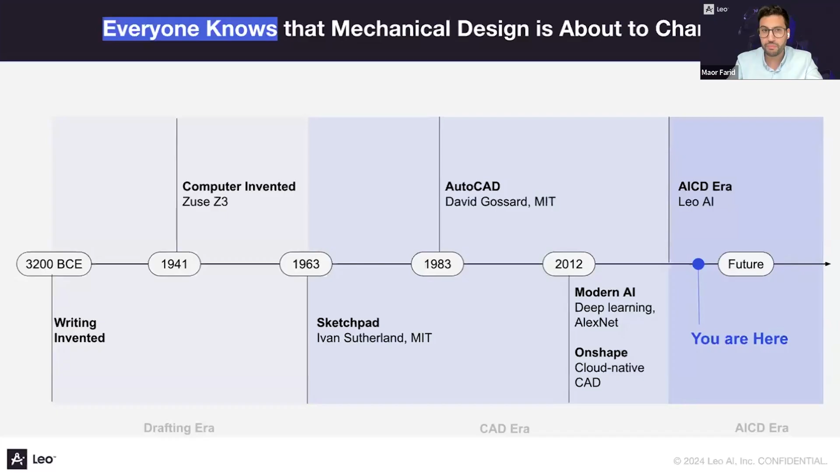And we're basically here. This is our time, mechanical engineers, to decide if we're letting this train pass by, or go all in and hop on the train. So what really is the problem with mechanical engineering today?

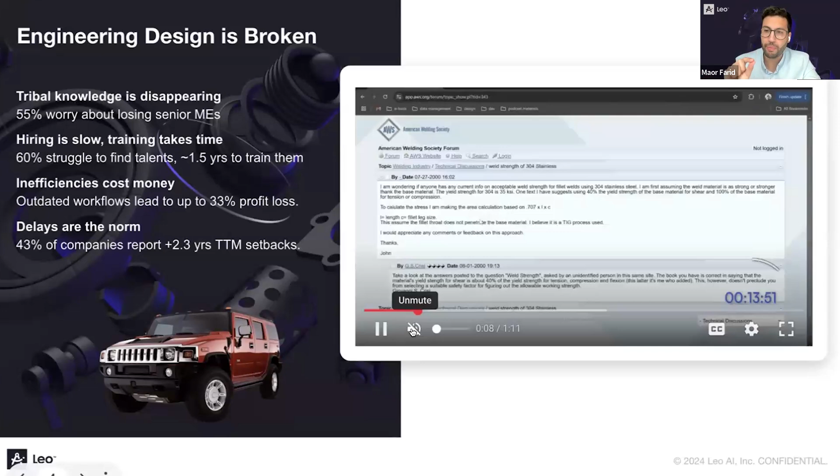What is so broken? This is a real screen recording of a mechanical engineer, not designing a new Hummer vehicle, but just trying to add the simplest part of engineering, which is a bolt, just one bolt. As you can see, maybe you sympathize with this, if you've done mechanical design.

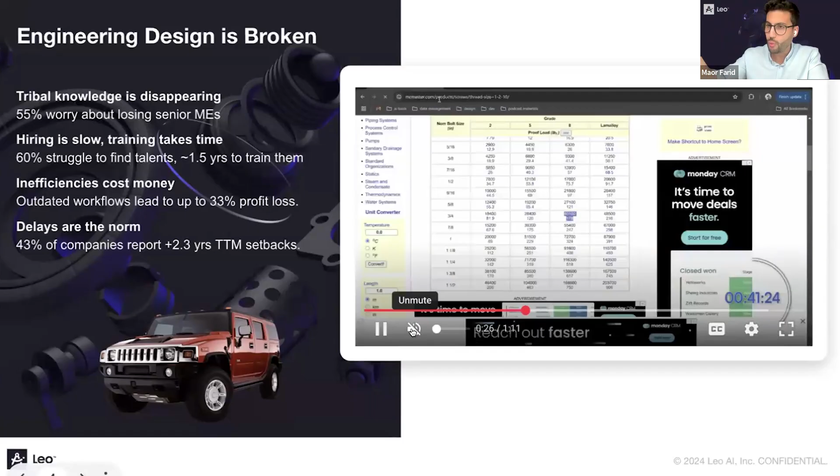He's going to the CAD only when he knows exactly what bolt to put, where, and what's the diameter, etc. But all the rest of mechanical engineering is not CAD. Engineering is not CAD, and CAD is not engineering.

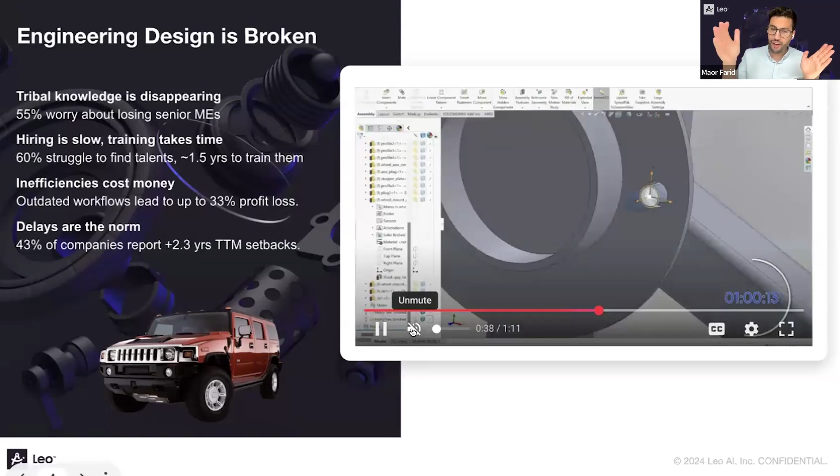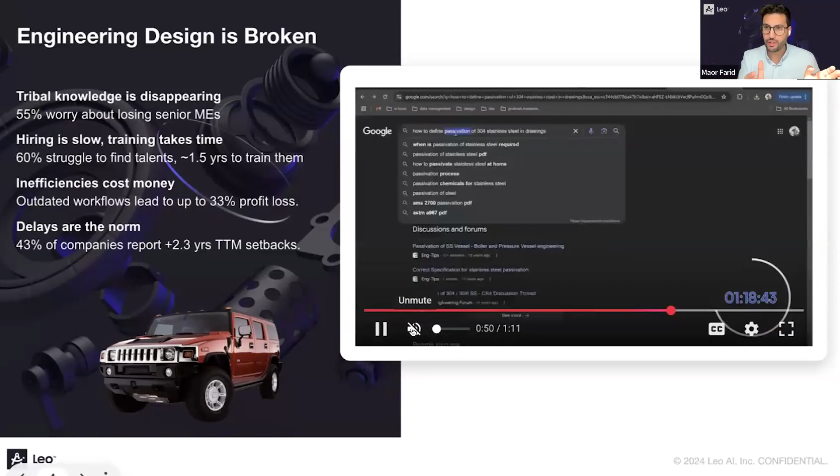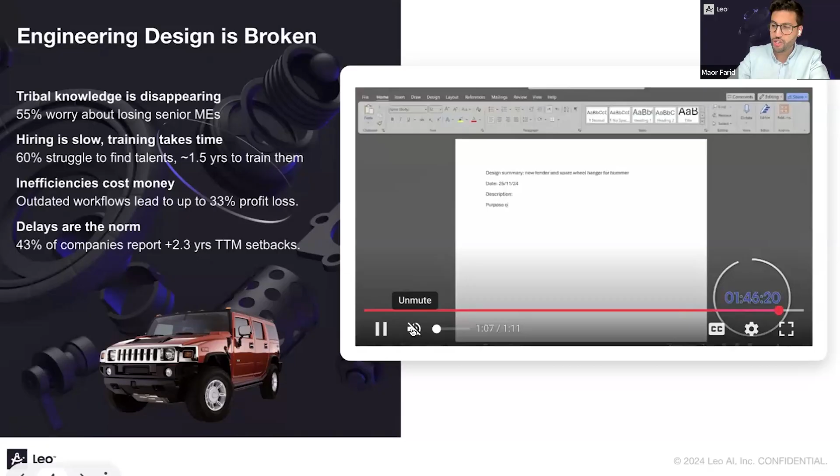85% of the time is us engineers trying to figure out what exactly to do, what exact bolt to choose. So he's going to Google, trying to find the formula for the Von Mises stress, putting it on his Excel spreadsheet, asking Joe at the end of the corridor what's the safety factor that he needs to choose, or he's going to his PLM trying to find the right document that documents the safety factor and plugs it into the Excel spreadsheet. He's going to his PLM trying to find the bolt when he finally has the diameter that he needs, going to TraceParts if it's not on his PLM, etc.

So in this example, it took 1 hour and 52 minutes. This is how tedious our work is. This is how not creative our work as mechanical engineers is. And it shouldn't be that way.

We should focus on building, creating. We should make the decision on what bolt we need in order to go to the really interesting question: how do I make this design more carbon efficient? How do I make it more comfortable for my customers, etc. So the problem is knowledge.

In 2025, engineering knowledge is still siloed. Our knowledge as engineers is locked behind four different vaults. The vaults of the brains of the later career engineers - you know them, the engineers that have been in your organization since day one. Only they know what coating to choose, what thickness to choose in this and that housing. This is the tribal knowledge.

It's locked in the mountains of documents and CAD files that you designed during the decades of existence of your enterprise. Just imagine how many CAD files you have in your PLM, how many documents are written in your PLM. Some of them are text files, some are CAD files. In order to know, for example, what's the minimal thickness of the housing that I used in the 2023 model I designed, I cannot read it anywhere in text. I need to open Onshape and measure in the CAD assembly what's the minimal thickness. A lot of the information is embedded in the CAD, not written in text.

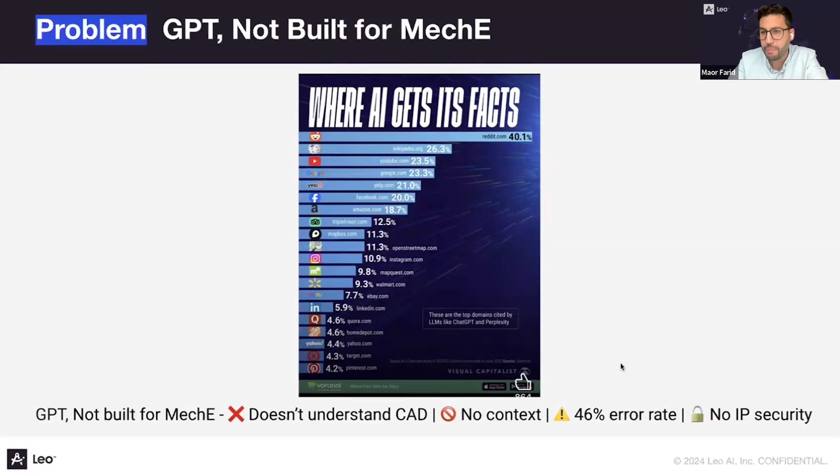So it's like talking to or getting insights from a blind mechanical engineer that cannot open your Onshape, your CAD tool, or whatever. If you're asking something about a shape or a design, it literally cannot help you. And of course, your IP is exposed when you're using ChatGPT.

So what we're doing at Leo, we're proud to say that we're developing the most boring AI for mechanical engineers possible, because we're focusing not on sexy, fairy dust kind of AI that looks good on TikTok, but we want to make you engineers happy. We want to make us, our friends, more efficient, feel like heroes, do fewer mistakes, and build better products faster. And how are we doing so?

We built the world's first AI that can understand CAD. It's not connected to Reddit. It's connected to 1 million bibles of engineering, only high fidelity, most reliable standards, workbooks, guidelines, and articles. It's connected into your PLM. It's like a super engineer that read all the wealth of knowledge of engineering and your tribal knowledge in your PLM, Windows directories, Confluence, and whatever.

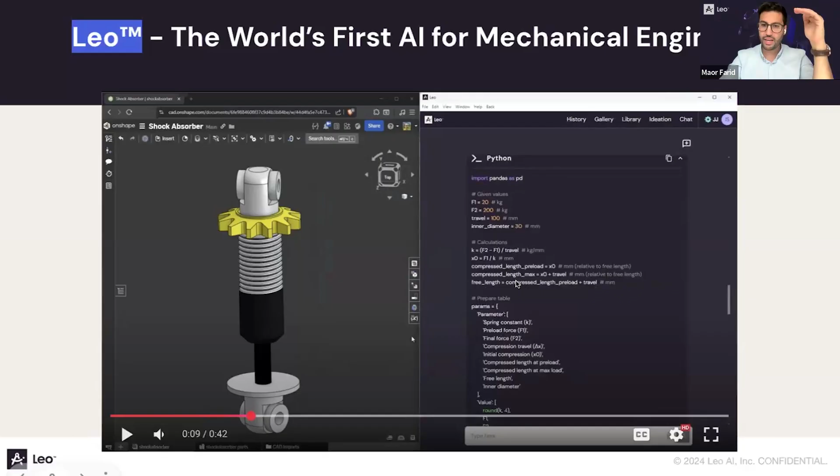You don't even need to open an Excel spreadsheet. Leo runs all the calculations for you. It provides the formulas from your guidelines or external guidelines, runs the calculation, and provides a table with all the calculations. You can download it if you'd like.

As an Excel spreadsheet. Then when you want to get the spring, you just tell Leo, hey, I want to buy the spring. First, Leo goes to your previous designs. If it finds it there, it provides you with the spring. If not, it goes to one of the 120 million vendor parts we have and provides you with the spring.

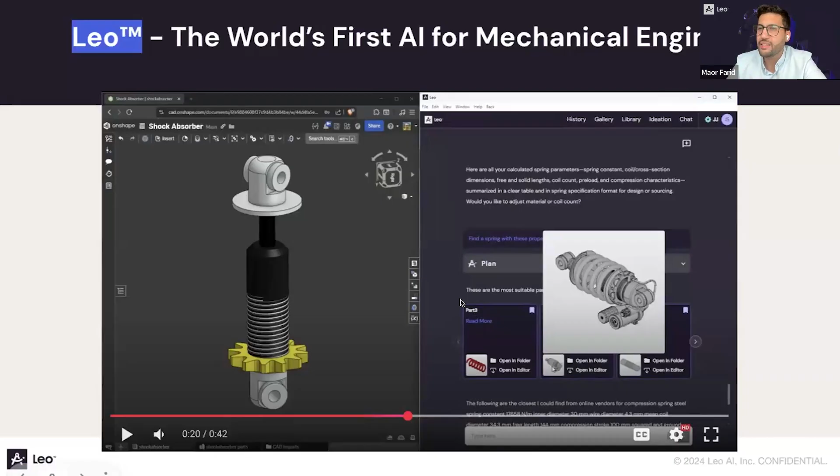Because Leo is not a language model like ChatGPT, it reads CAD. So even if the part is called 'part 3' and doesn't have the spring constant or length in its metadata, Leo understands CAD, sees what's in it, and can provide you with the spring that matches your needs and requirements. As you can see, they're a good fit, unsurprisingly, because it understands CAD and because it made the calculation for you.

Of course, it also asks guiding questions if it's missing information. So the answers are as reliable as they could be.

So what's the difference between ChatGPT and Leo? It's a more general question really: what's the difference between vertical AI—AI made by and for a specific profession, like AI for lawyers, AI for developers—and generic AI tools? Leo's differentiation with respect to ChatGPT and others is context, workflow integration, security, and last but not least, CAD understanding.

Context: it's integrated into your PDM. It knows your best practices and answers based on them, not just generic things you read on the internet. It's connected into your workflow. Leo works alongside your CAD, so you don't need to go to the browser and open it again. It's always there on your desktop as a desktop app.

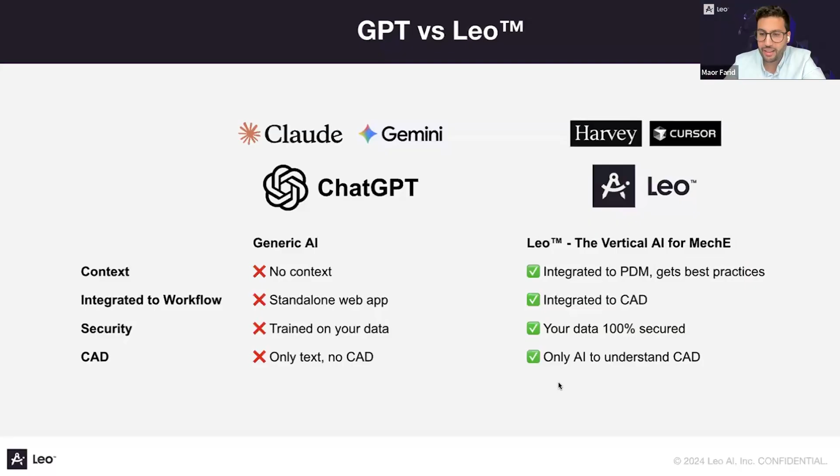It has top-tier, enterprise-grade, SOC 2 certified security—things we're bored about, but your IT guys are thrilled about. We have all the documentation needed. Again, this is the only one that understands CAD, so the only one that can serve mechanical engineers.

Maybe with that said, I've spoken enough. So this is a great opportunity to see how JJ is using Leo.

So JJ, what's up, man? Are you here with us? Hey, can everybody hear me? You hear me good? Yeah, I hear you loud and clear, man. I'm so happy to see you here again with us.

We're super thrilled about what you're building with Leo, and recently you started educating the next generation of engineers to use it. You started a new course training engineers to use Leo, right? That's correct. I was already teaching a course in CAD using Onshape, and we started integrating AI into the process to show them how to get the engineering done. The feedback has been incredible—people are really impressed, and they're learning mostly how it helps with the workflow.

People seem to have this illusion that AI is going to come in and do all the work for them, and you're going to say 'Build me a robot' and it'll just do it. But that's not really where it is. It's really helping with the workflow, all the very tedious tasks that take up most of our time.

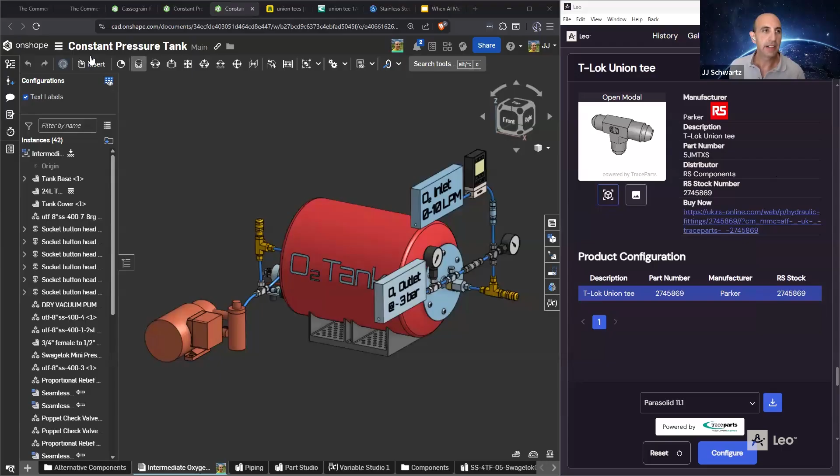I'll talk briefly about myself. Let me share my screen so I can show what we're doing. I have Leo open over here. Briefly about myself, I worked in space and aerospace, and most recently I'm a contributing author to the Commercial Lunar Economy Field Guide.

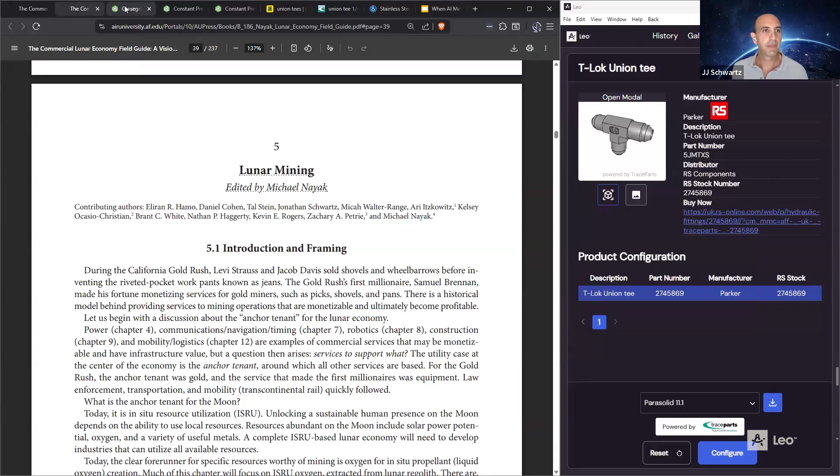I encourage you all to check it out, I'll share the link in the description. My background on my most recent project was on lunar mining, where I was a contributing author to this guidebook. That's something I'd encourage everyone to check out.

On that backdrop, I decided to work on some projects related to lunar mining of oxygen. One of the big challenges is heating the lunar regolith so you could produce oxygen. So one of the things I tried to do was design this lunar solar heat reflector that would concentrate the heat, as you can see from this simulation, and focus all the beams onto the surface of the moon to heat the lunar regolith.

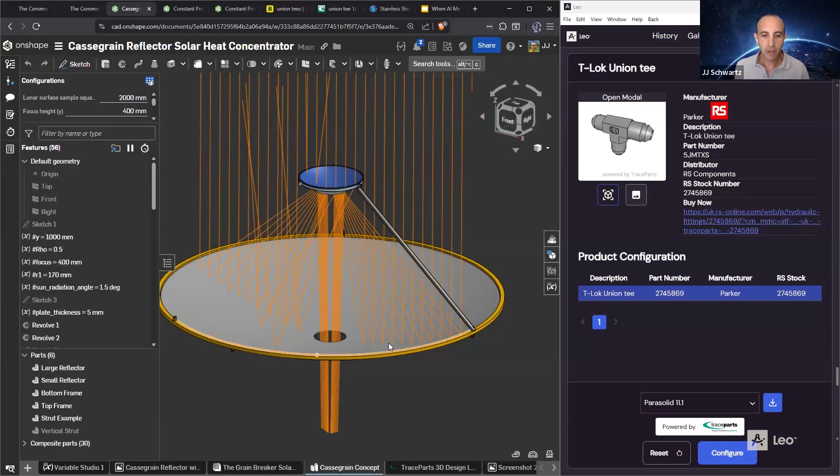This is actually nostalgic for me to bring up this project—it's one of the first projects I worked on with Leo. Leo was really the co-pilot on this. It helped me design the concept, helped me with the calculations for the optimal measurements and designs, and ultimately I was able to make this. In the end, Leo helps in the background.

Then finally, in Onshape, I would do the rest of the CAD work, and what you can see here is a solar ray simulation to fine tune the design. So this is one little aspect that I worked on.

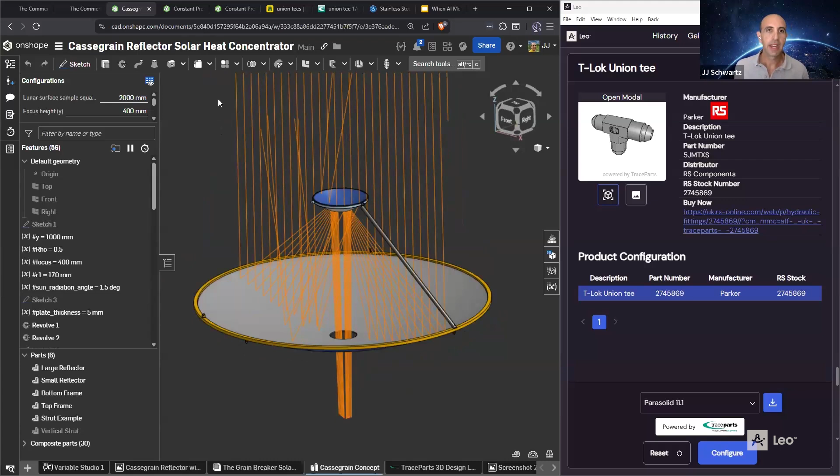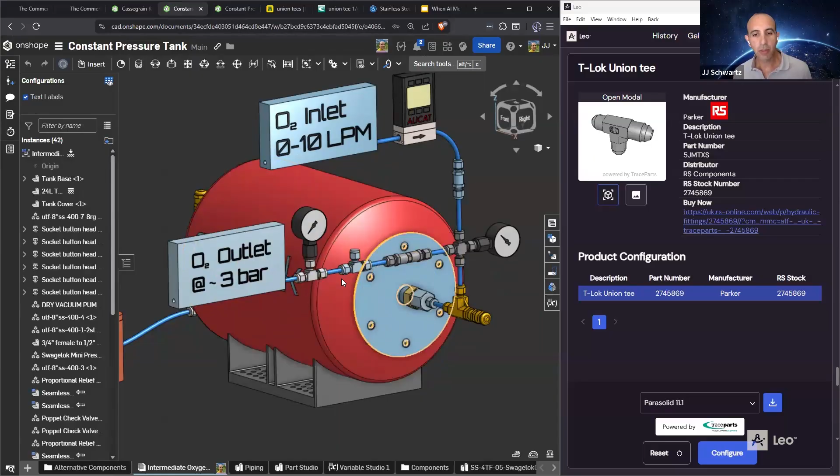The next project I'd really like to focus on, where Leo took it to the next level in terms of heavy lifting, is this tank. One of the challenges of mining oxygen, or mining any gas, is that you need to store that gas in a tank and release it at a constant pressure. So this was a design concept we came up with to store the gas produced in a bladder and release it slowly at a constant pressure.

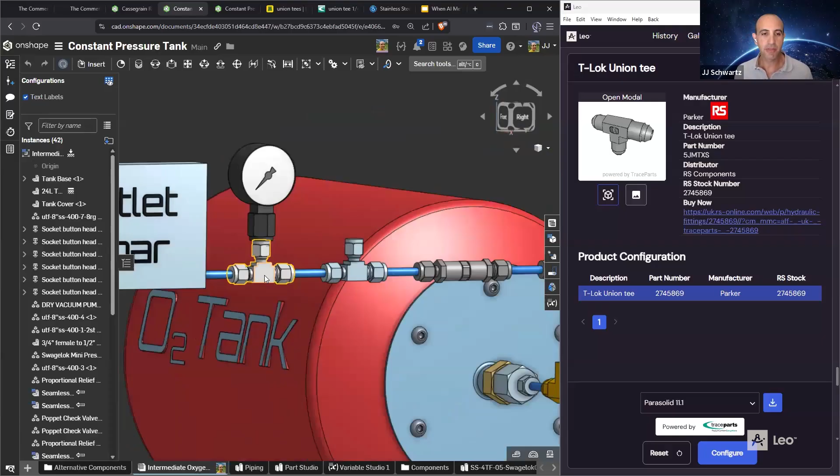There's a lot of valves involved. Unfortunately there's not enough time to get into the nitty gritty of everything here—if Maura would like, we can organize another webinar about that. What I'd really like to talk about is how Leo helped me with the finer details: all these components, all these swagelok valves, all of the connections. That's what you see over here.

I conducted my search to find all these valves. In the past, I might go into McMaster's site and start searching through—this was as good as it got when I started the project. You would look through here, see what fit best based on the budget. I'd also search on TraceParts to get models, download them, and integrate them into my design.

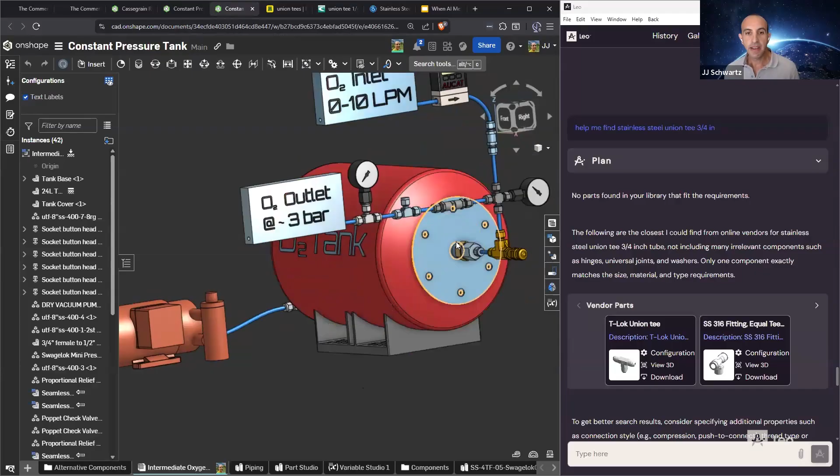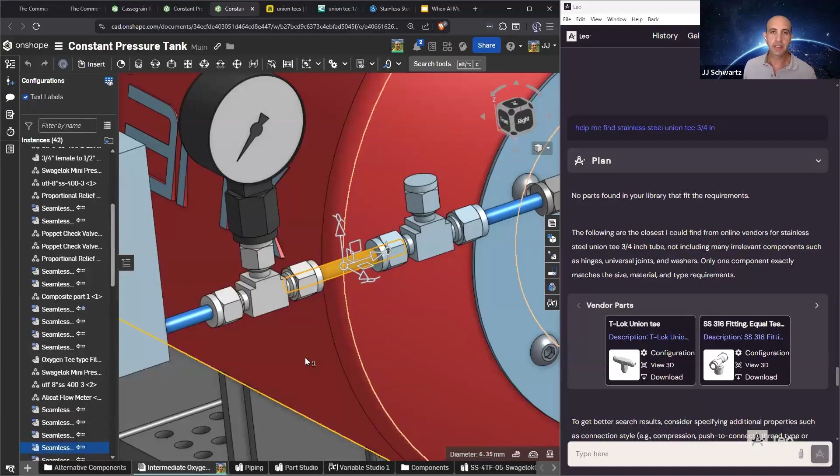Once I come up with this concept, it's not enough to simply run with this design on its own—I'll need to make different iterations, one for the lab. If I have a quarter inch piping here, we're going to have to do different tests to see if we want to work with a 1/4 inch or 1/2 inch. So let me go over to Leo and ask him to help me find different diameters, in this case 3/4 of an inch.

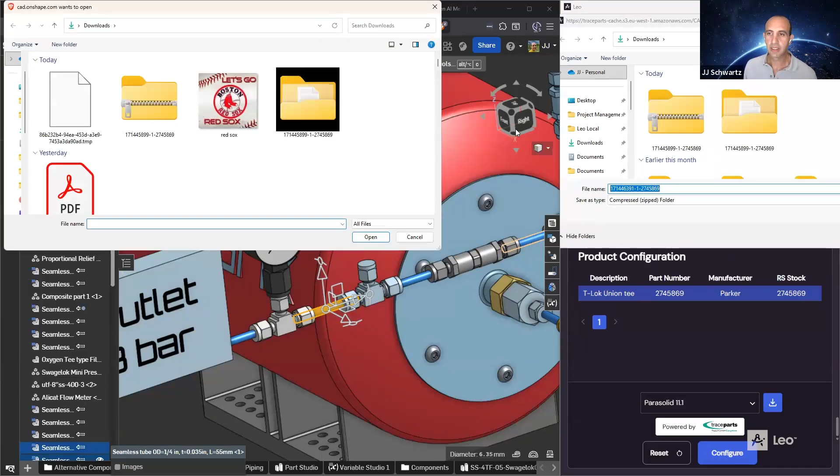Actually I was looking for a 1/2 inch, and here's my 1/2 inch search—sorry, I did a couple of searches. Over here we're going to see the TraceParts integration being used in Leo. In the past I would have had to go searching all over, but here I can just download the parts directly and show you how I integrated it directly into my model. I've downloaded the part over here, and now I can just upload it. Oh, I've got the zip over here, sorry.

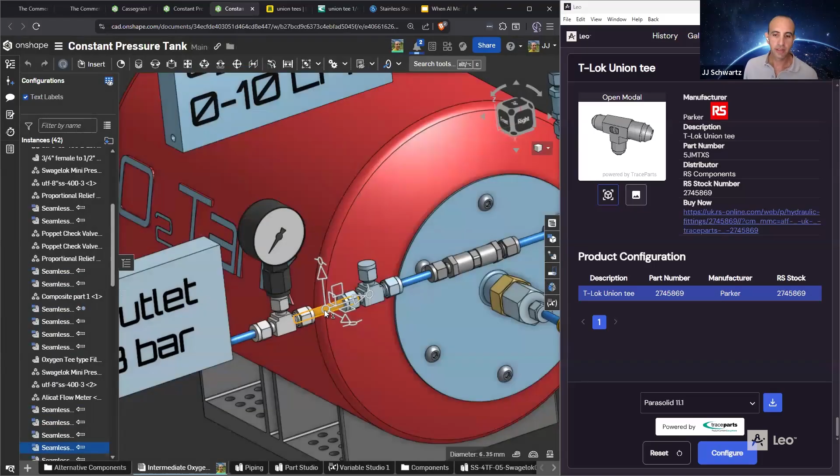Sorry, I pressed the wrong button. I'm importing it now into the Onshape model. And just like that, I went from doing a quick search, looking for the component with Leo, to very quickly integrating it into my model.

I think it's super inspiring, JJ. So usually, could you elaborate about the previous ways that you used to choose components? What were the mistakes you usually came across, and what were the consequences of those mistakes? What happens if you choose wrong? So what are the issues?

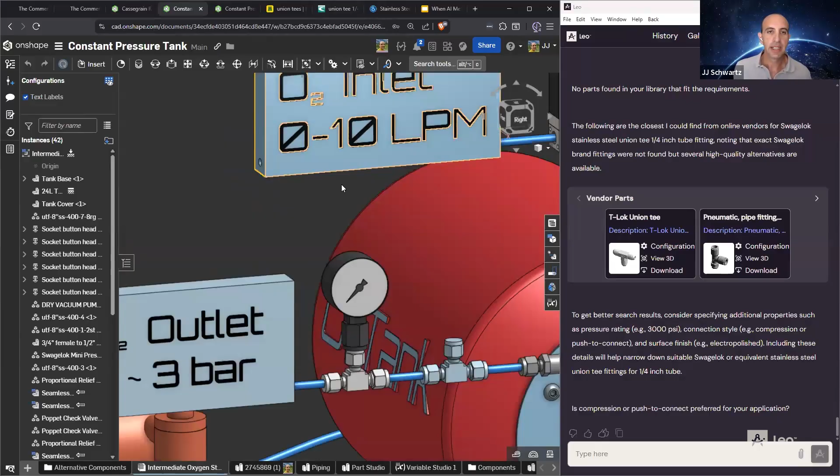Yeah, so one of the things I was talking about is also the different specs. Sometimes you can see here 0 to 10 liters per minute, the outlet being at 3 bars. So these are technical things.

As you can see, Leo right away reminds you, helps you—it's not just searching, anybody could just go into Google and say give me a union tee, and then go on searching for it. When you search with Leo, it's kind of pointing you in the right direction, reminding you which pressure, which connection style you're looking at. That helps avoid mistakes, especially with less experienced engineers who might not be familiar with Swagelok connections, snap connections, or pneumatic connections. So that's one good example.

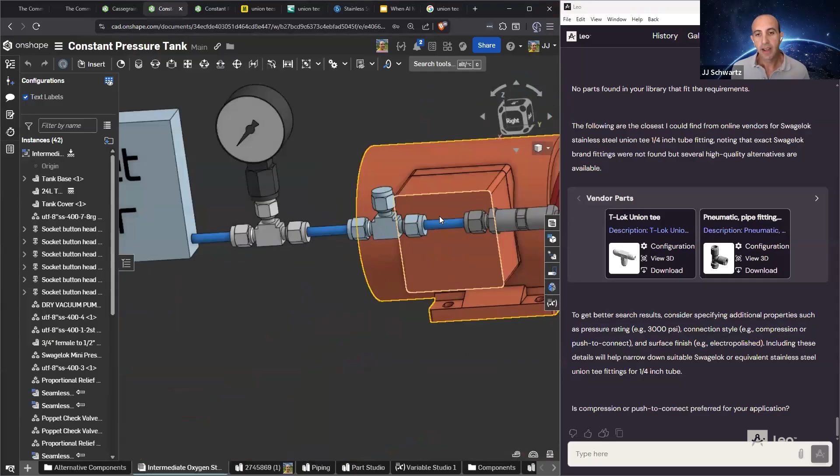The other example is, like I was saying, I want to compare. This is a concept that might be good for a space application, but anything before it goes into space is going to need to be tested. So you're going to want to make a much less expensive model, and you're going to look for alternative parts. That's the other place where Leo really helps out. You search for the components, and it's going to find you right here different components that you can compare with in real time. So it's having the information available, and also being pointed in the right direction—like you can see here, don't forget the important details of the pressure rating and connection style.

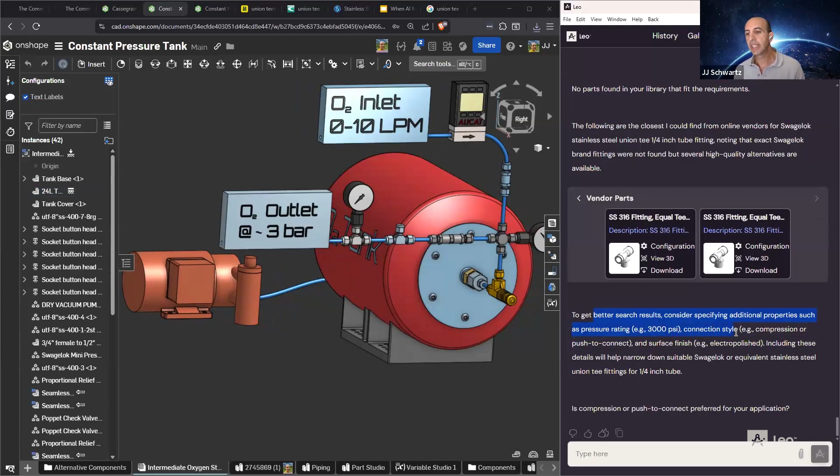Amazing, and thank you for sharing. And regarding time, do you think the previous ways you used to choose parts compare to now?

I did this in real time. You see, I already have the component here in my model that I downloaded, and I did that right here in front of you. So that was already much quicker. Even more important, there's two things: there's the time savings, which, to be honest, is sometimes hard to measure. But the thing that isn't hard to measure is the organization of your workflow.

You have everything—your chat is saved here. It evolves. In the end, you're working with an AI assistant that's going to be pointing you in the right direction. If you make a typo, if you forgot a spec, Leo will remind you. So there's the organization that's very important, and that saves you time in itself because it gives you confidence, and it's keeping everything organized in this list. Like now I'm showing you this chat, but this chat is saved in your history.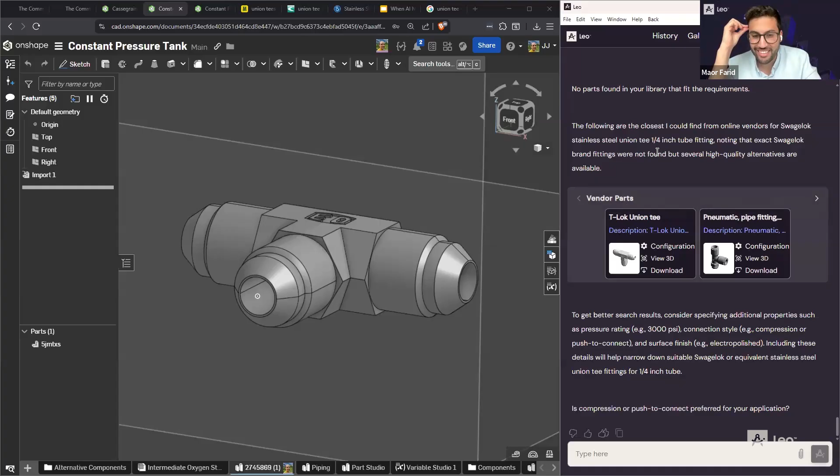Got it. Wonderful. So what's the next project you're going to use Leo for, JJ? Share with us, we're a little bit jealous. Well, now I want to be an engineer again.

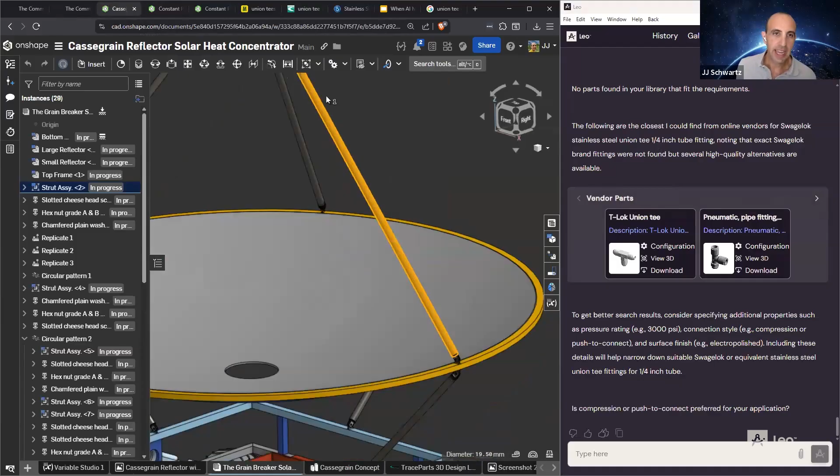Well, to be honest, I'm using Leo right now. I've shown you this. The next project I'm working on is a simple thing—I'm asking Leo to help me design the struts here, and also the protection so that it'll work in space. And it would have to be a mechanism that could be kind of deployable.

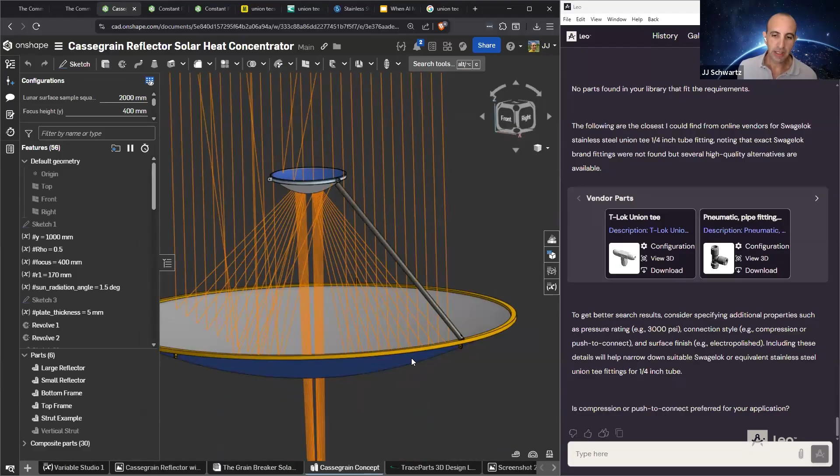The whole idea, if I come back to this—this is a side project of mine—is to have this be a folding thing that could easily fold up into a spacecraft. So that's what I'm working on now with Leo, to see how the different mechanisms involved between the struts work, and how to fold everything up.